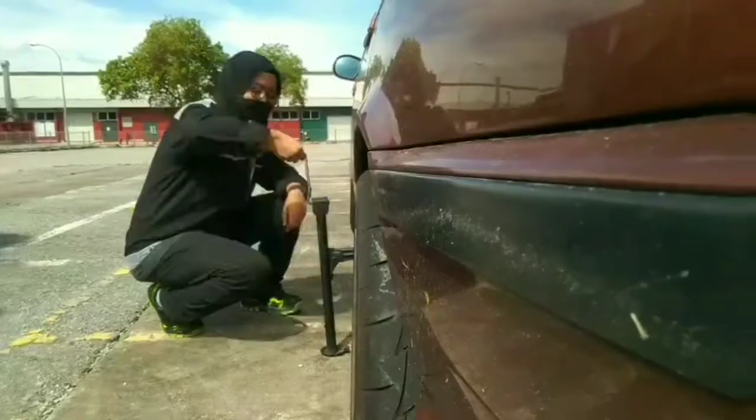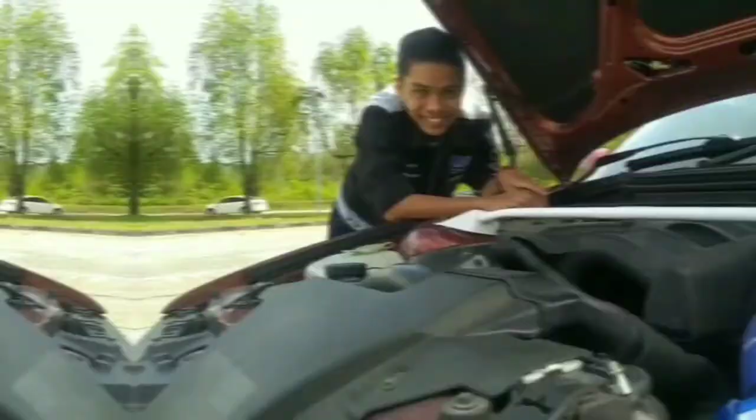Wabarakatuh. Okay, for today's lab session, we will do lab 3, about the drum brake.

For this drum brake, we have two main objectives. The first one, to inspect the condition of the drum brake assembly. And the second one, to name all parts of the drum brake assembly. So, those are the two main objectives that we want to learn for today's lab session. So, let's start with the procedure.

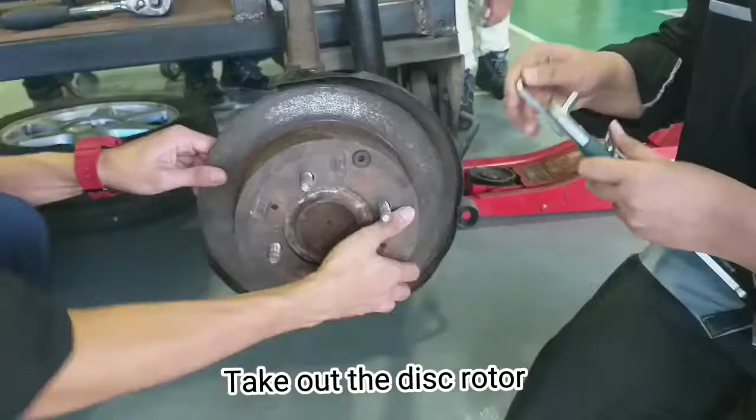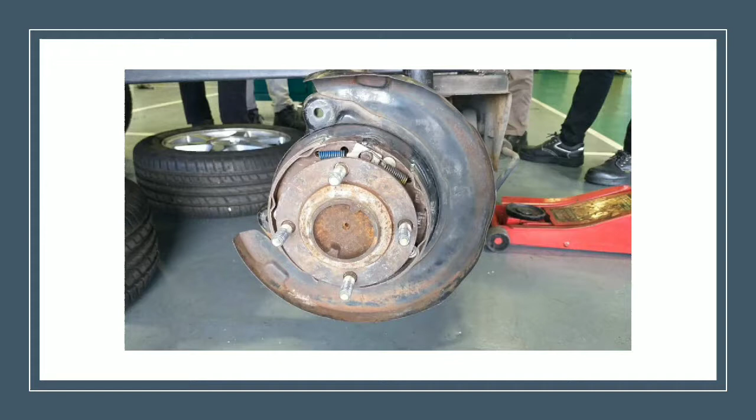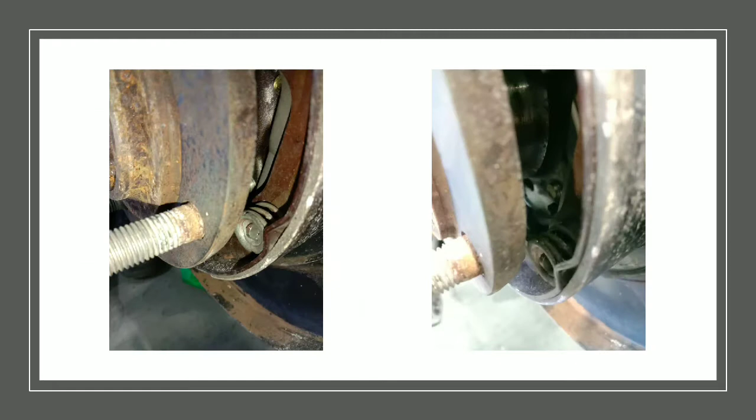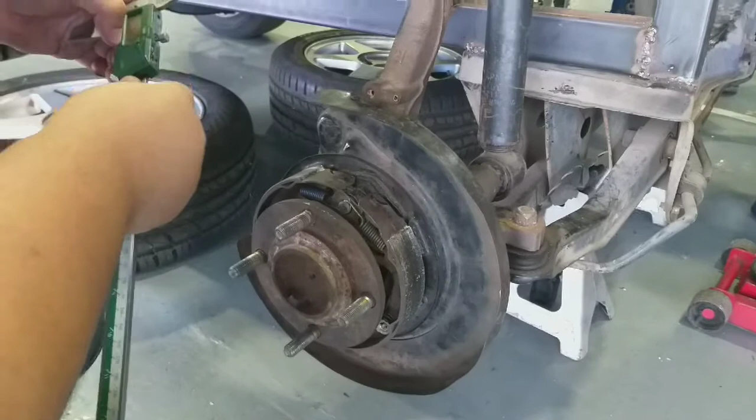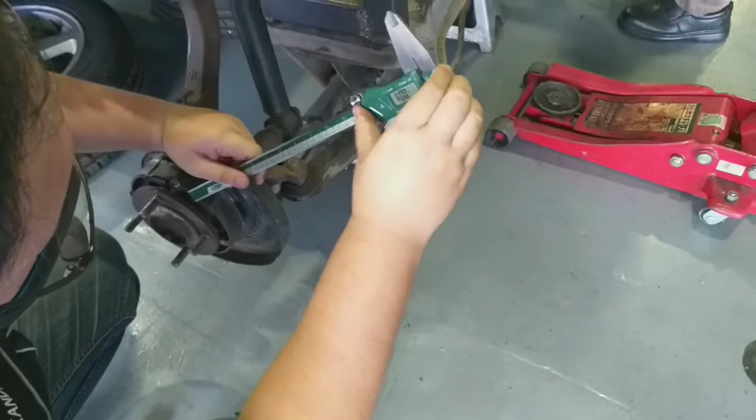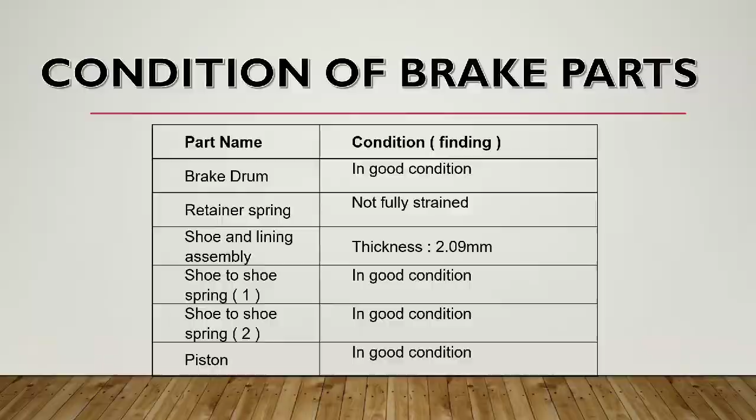This is the table summarizing the condition of the brake parts. As you can see, for the retainer spring, the condition is not fully strained, and the thickness is 2.09 mm. In this video, we will show you how we take the data for the brake drum inside diameter. We will take 4 readings to know the condition of the brake.

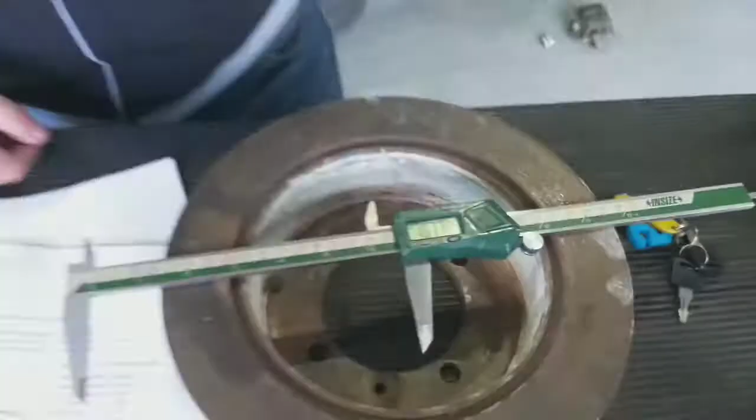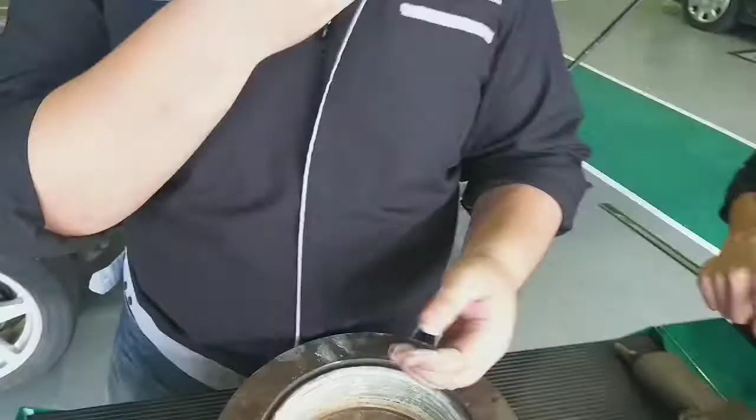So this is for the drum brake inspection. As you can see here, the inner lining of the drum brake housing is quite smooth. Supposedly the surface has to be rough for very efficient frictional force when braking. But the lining here seems to be not that great compared to what it should be.

For this particular car, it's actually a disc brake system. So this drum brake system is used for the handbrake. It's not used for proper braking. But we can still attach it here and rotate it. As you can see, we can still rotate the rotor because it's for the handbrake. So once the handbrake engages, it would actually stop.

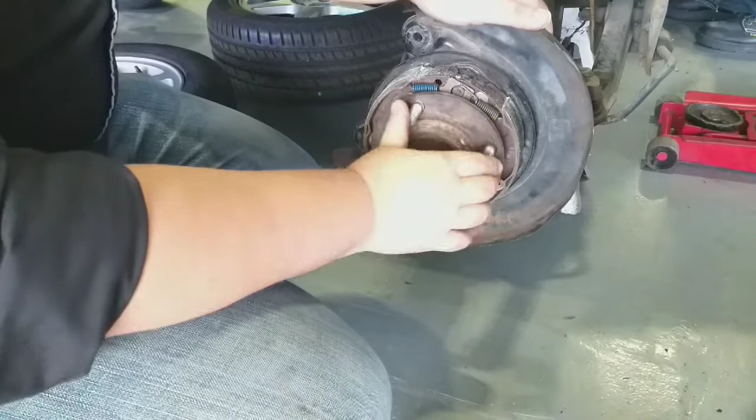So the frictional force between the brake shoe and the lining should be great. But from the inspection here, the thickness of the shoe is not up to spec and the surface inside the drum is very smooth. So it causes its frictional force during braking to be not great.

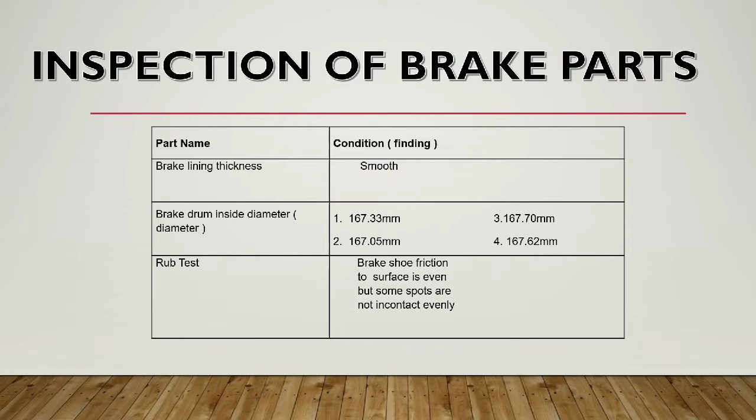So this table shows you the summary of the inspection of the brake parts. For the rub test, the brake shoe's friction surface is even, but some spots are not in contact evenly. And as you saw in the previous video, the brake lining thickness is too small, and for the brake drum inside diameter you can see we have 4 readings, and that's the result we got after the inspection. So let's start with answering the questions.

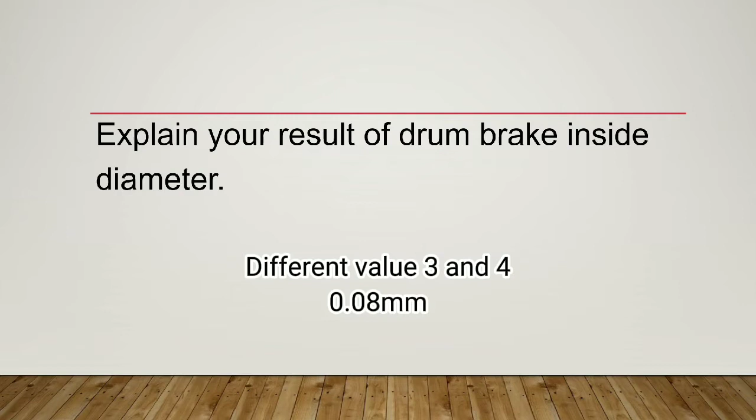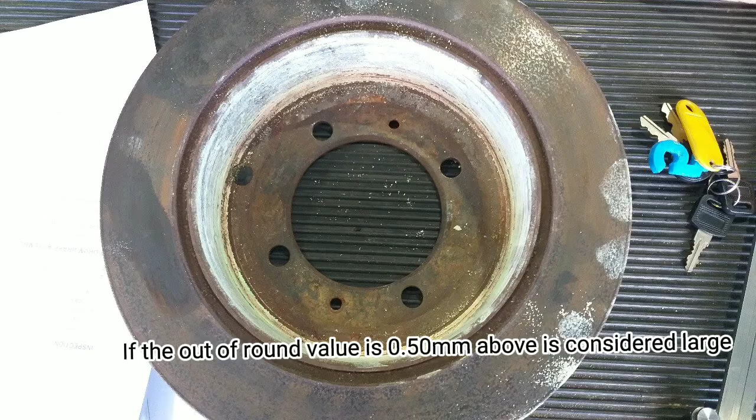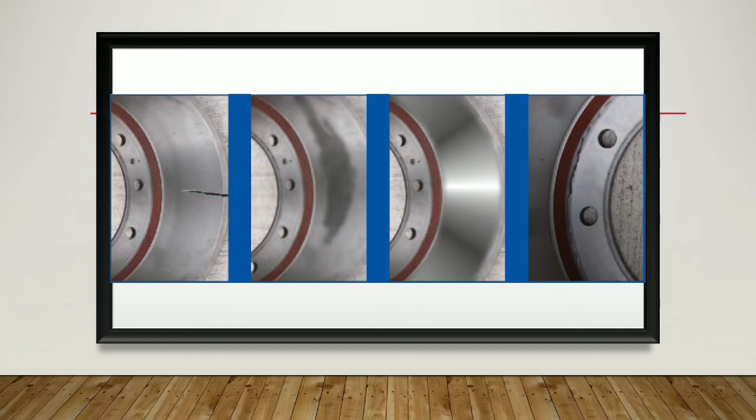For this question, if a deep crack is found on the drum, can it be repaired? At the beginning of a trip, it's important to check the drum brake during your walk-around inspection. It is unsafe to drive if any drum brake has a crack more than 1/2 of the width of the friction area, so you need to immediately change the drum brake. This picture shows you 4 examples of cracked drums.

The advantages of drum brakes compared to disc brakes: drum brakes make excellent parking brakes. Second, low effort from the driver holds a heavy wheel in place. Disc brakes require a complex set of extra parts to serve as the parking brake.

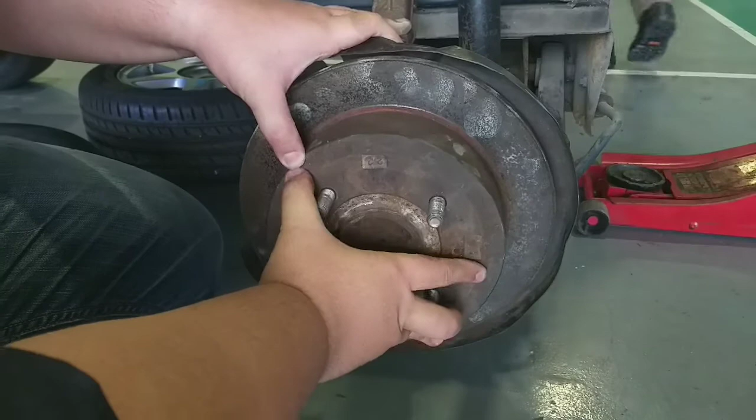So as you can see here, when we attach the brake drum components again, when the brake drum is rotating and we brake, a good drum brake system would slowly rotate and then stop. But if it keeps slowly rotating and doesn't stop in time, it means the brake shoe is worn out and the lining inside is also worn out.

Now, I'm not saying it would wear out easily compared to a disc brake system, but still, from time to time you need to inspect and check that everything is good, so that our brakes perform when we need to stop, as it is for safety purposes in a vehicle.